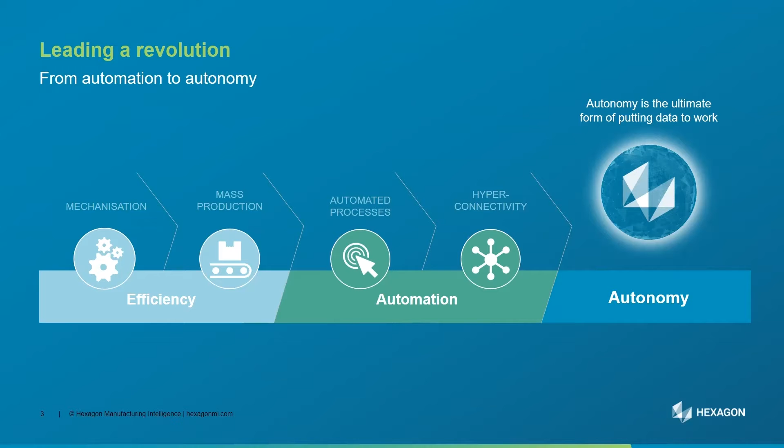This slide isn't to explain the past industrial revolutions, it's to illustrate where we are and where we are heading, a revolution that Hexagon is leading, from automation to autonomy. Why is this so important? The technologies we love the most are the ones which we don't have to think about, the ones that think for us. This is why we are focused on autonomy.

It's the ultimate form of putting data to work, which leads to the greatest gains in efficiency, quality, and productivity, which are the very outcomes our customers seek. This slide talks about our core competencies: sensor solutions for data capture, software solutions for data intelligence, and autonomous solutions for data leverage.

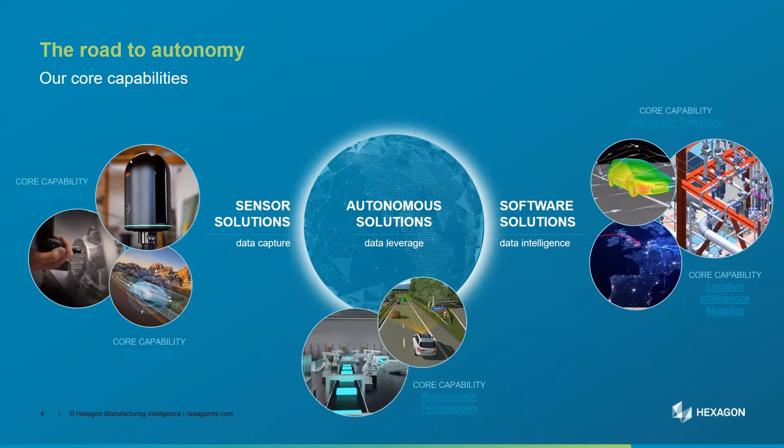Before getting into the acceleration part of e-mobility, let me highlight the key challenges today in design and manufacturing of e-mobility. The first and foremost challenge is range anxiety. This can be addressed through powertrain optimization, battery thermal management, lightweighting aspects, and tire rolling resistance improvement. There are a lot of areas where design can influence range anxiety.

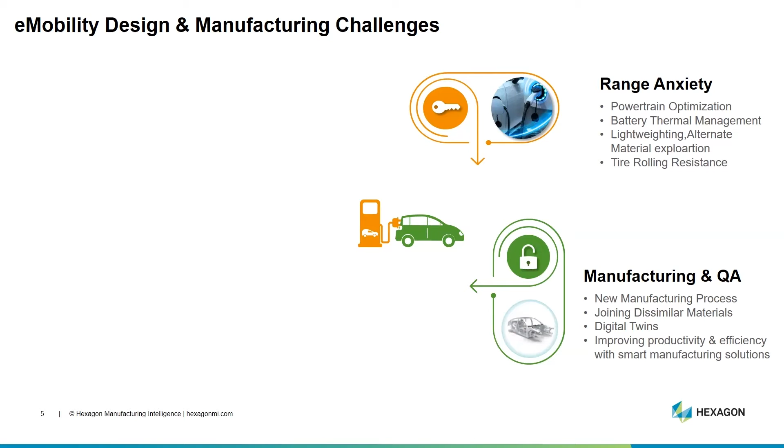The second most important point is manufacturing and quality assurance. There are a lot of new parts coming into EVs, from battery manufacturing to powertrains, so the manufacturing processes are new and there are challenges there: joining of dissimilar materials and improving productivity and efficiency with smart manufacturing solutions.

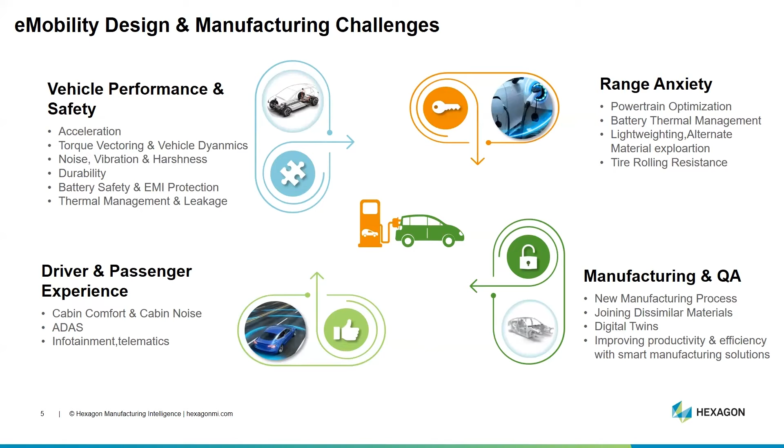The third one is on driver and passenger expectations or experience expectations. There is a high amount of expectation in terms of cabin comfort, ADAS feature availability, infotainment, and telematics. The final point is on vehicle performance and safety. With battery systems and a lot of electronic components, the way it is assessed for safety is different, and that's another key challenge: EMI protection, battery safety, thermal management, and leakages.

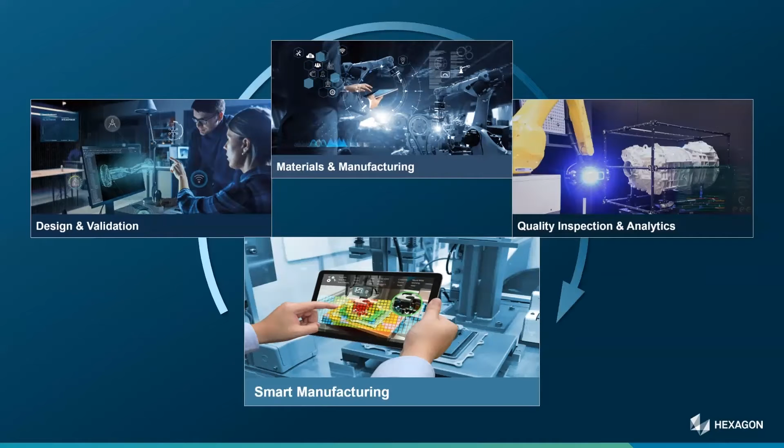Hexagon's approach is to address these challenges in a holistic way by bringing in the key pillars of product development: design and validation, manufacturing, and quality. Let me give you a brief of each of these verticals.

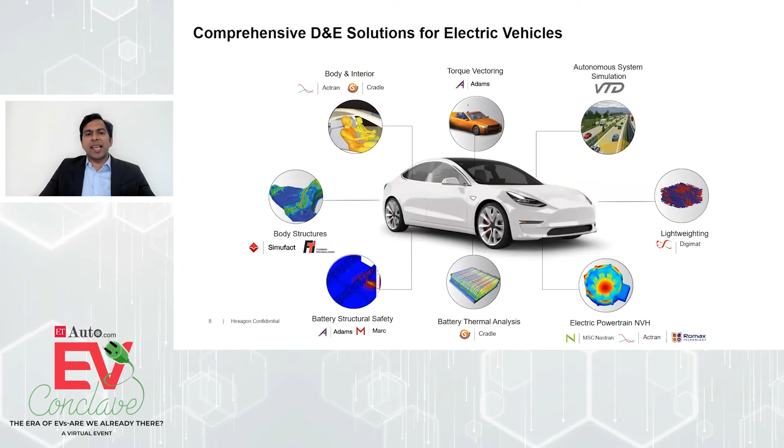Design and engineering is mainly on the simulation side, on how we can influence the concept design stage of product development. We have a comprehensive set of e-mobility focused simulation solutions addressing different physics and challenges like battery thermal management, e-powertrain noise, lightweighting, structural safety, and advanced driver assistance systems.

From a manufacturing point of view, it's important to address the manufacturing process parameters upfront in the design cycle. We help you optimize these parameters for different manufacturing processes from the concept design stage. For example, in a welding process, you would want to know the optimum path for welding, the clamping location, the number of clamps, so that defects like distortion from welding and residual stresses are addressed.

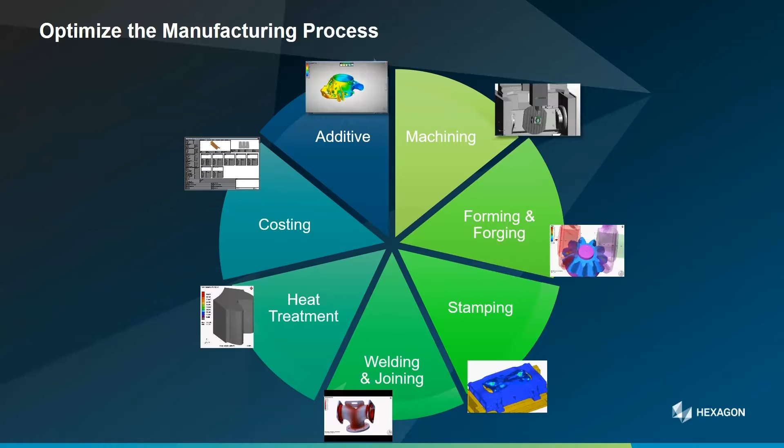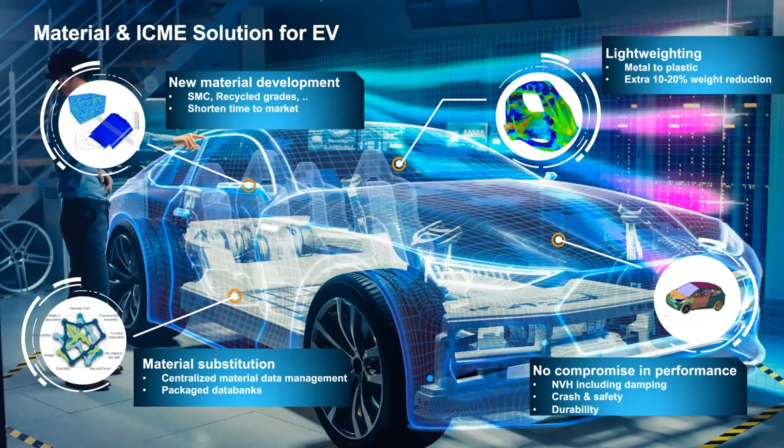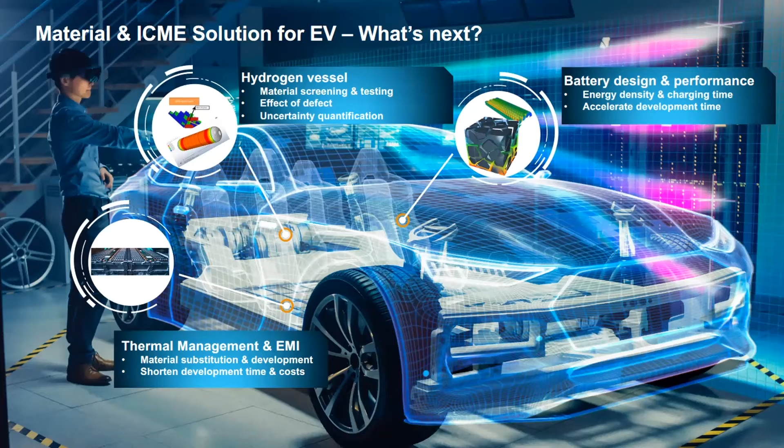My belief is that materials will shape the future of EVs. Today, range, cost, and performance are the three important factors driving material selection. Industry is exploring beyond the conventional materials used today. There is also a lot of focus in making EVs more sustainable, not only from the energy consumption and emissions point of view, but also from material circularity and toxicity.

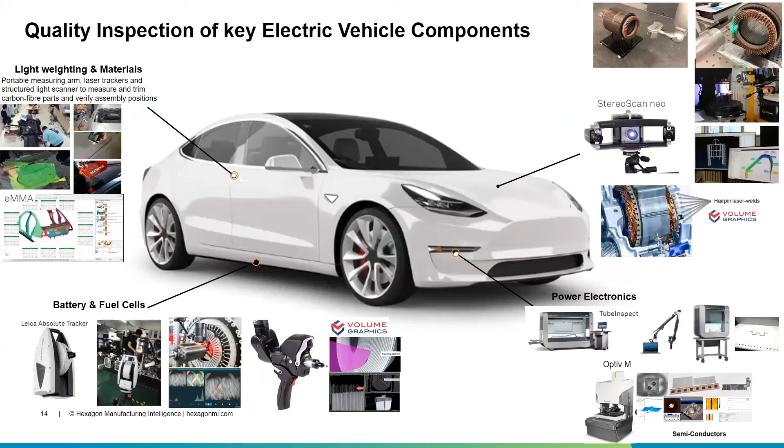The third vertical is on quality. With a lot of new components coming in, the way they are measured is different, and the devices used for their measurements are also different, so there are a lot of challenges related to that. These are some of the e-mobility components highlighted here and how quality assurance is taken care of.

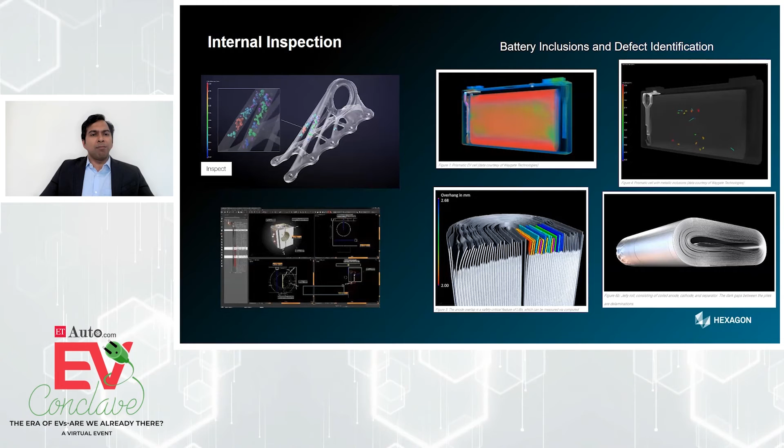So that was about external inspection. We also need to ensure internal inspection, done through computed tomography studies. This will help you measure or check quality without destroying the parts, in a non-destructive way. Use cases can be many, such as safety critical parts like battery systems, where ensuring quality of the battery involves looking for inclusions and defects in the anode, overhangs, etc.

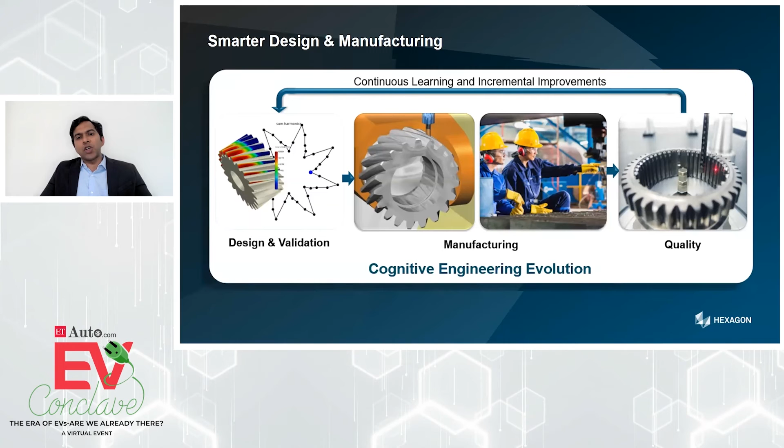Those were the three important verticals of product development. Our unique value proposition is connecting design and engineering, manufacturing, and quality with a continuous improvement loop, ensuring your end product is as designed.

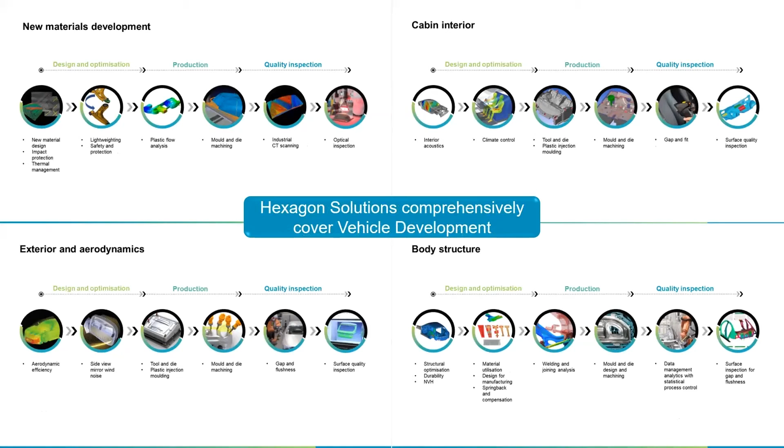We have workflows built for each EV subsystem in line with the concept discussed previously, for electric motor, drivetrain, power electronics, battery and fuel cells. Similarly, for vehicle level developments in terms of new material development, cabin interiors, exterior and aerodynamics, and body structure.

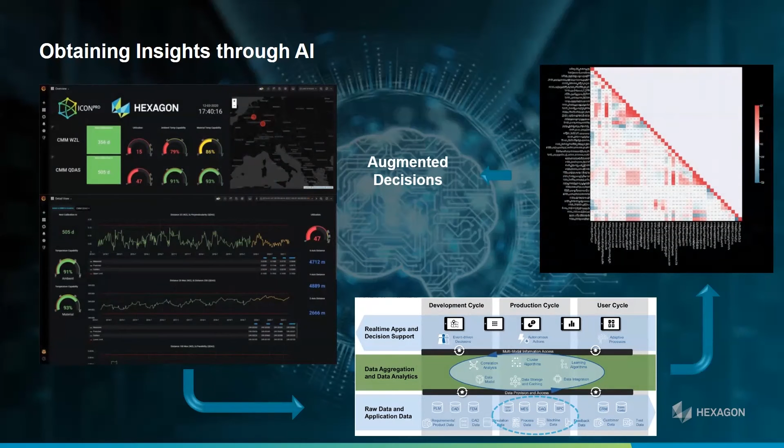Another important topic is the influence of AI and ML in EV development. One use case is with a lot of information coming from manufacturing, testing, and simulation, how to use that data intelligently to make an augmented decision. That's where AI ML algorithms can help you.

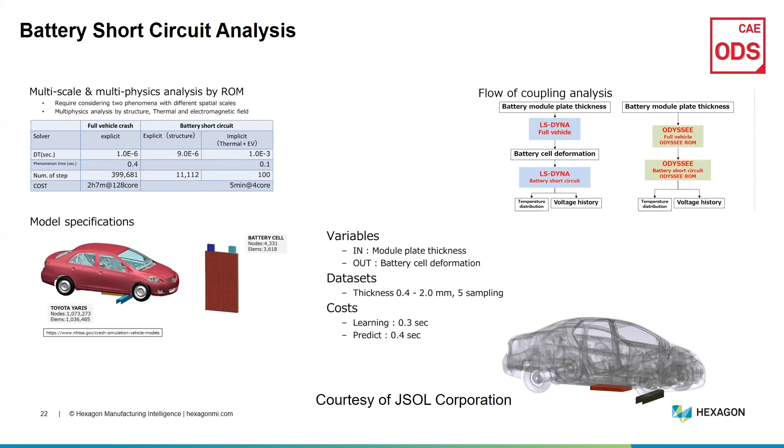Another important application of AI ML methods has been increasing the efficiency of simulation solvers through reduced order models. This is a use case of battery impact and short circuit analysis, a multiphysics case with structural, thermal, and electromagnetic fields involved. If you look at the compression deformation, terminal voltage, and temperature distribution, it's a 98% match with 1% of the time required for an FEA analysis. It's possible to dramatically reduce simulation cost using such reduced order models.

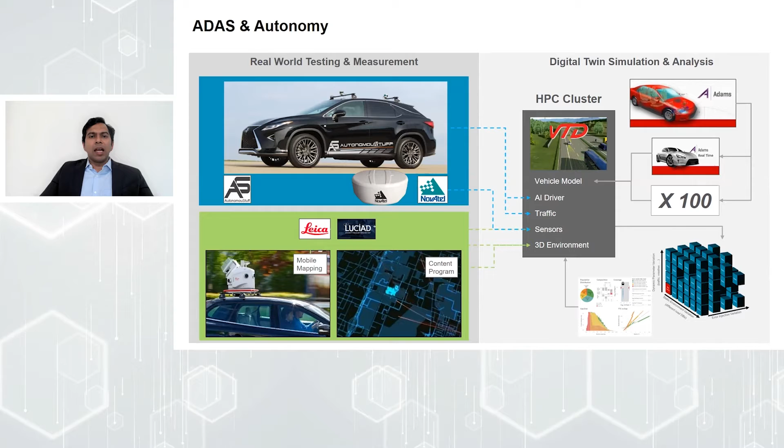It also finds application in areas like digital twins. There is an increased expectation for e-mobility to be smart, loaded with ADAS features. Hexagon's autonomous vehicle solutions help you design and validate, both virtually and physically, different levels of autonomy or ADAS features. Another interesting offering is on consulting and services for e-mobility.

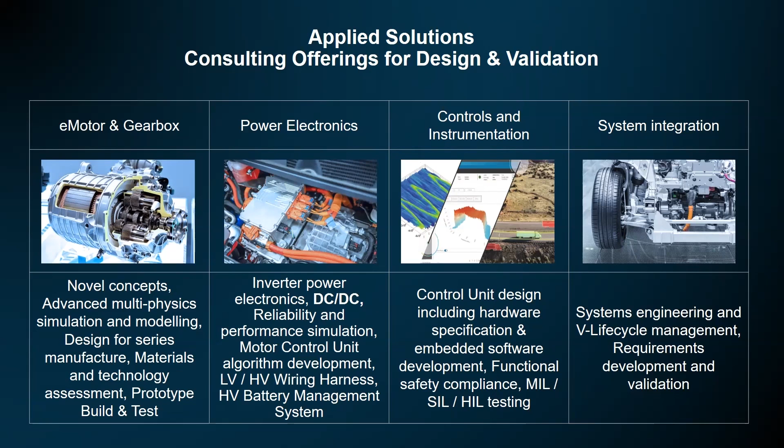We cover from concept to detailed design, evaluation, assessment of material and technology, life prediction and safety of e-powertrain, motor, power electronics, controls, and instrumentation.